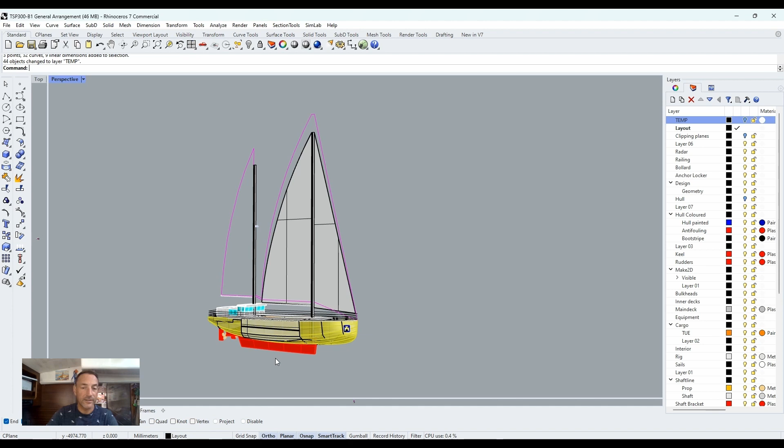So let's get started - we're going to have a look at what I've done up till now. I worked on the hull, the keel, the rig, and the sails, and I'll show you where I am. I'm currently working on a general arrangement, and I've started with it, so I'll quickly do an update of what I've done so far.

As you can see, the orange and purple lines are the new sails - this is an increase of almost 50 square meters. I've raised the masts and also the boom line a little bit to give more clearance for cargo handling.

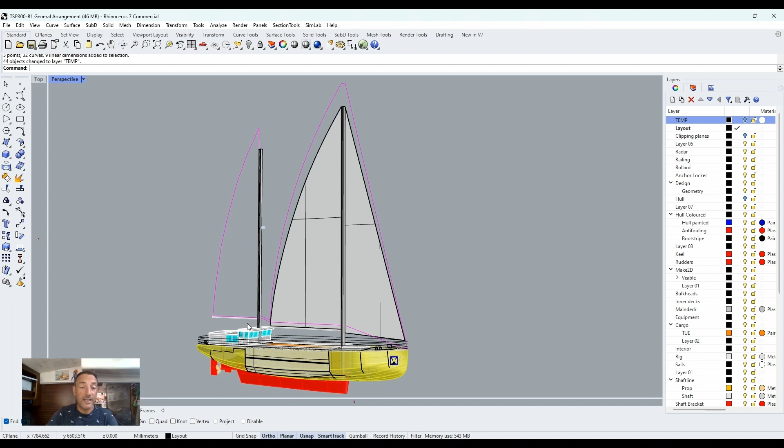And I've also raised the aft boom to give more height for the new deck house and seating area. Today I'm also going to try to put the accommodation down into the hull and raise the aft deck, aft of the bridge. Yeah, so this is the new hull.

I've been very busy fairing it. I've improved the bow shape, and the surfaces are all developable now, so you can actually make them all out of flat plate.

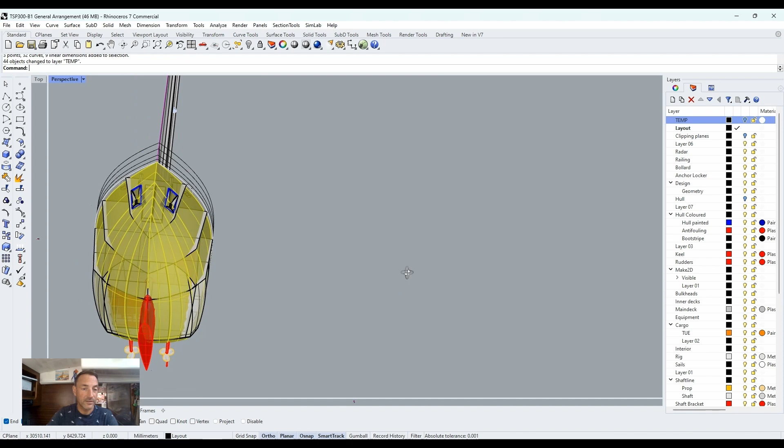As you can see, the hull has gotten a little bit wider. I went to 7 meters instead of 6.9 as discussed. The volume was getting too small, and I would have had to increase the block coefficient too much, so I opted for this option.

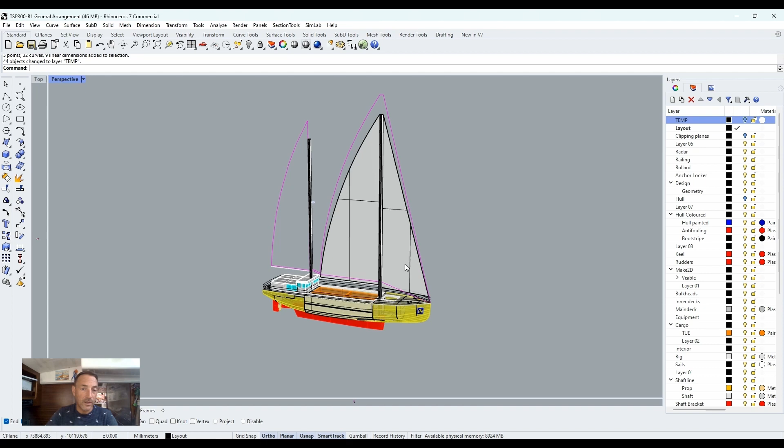And today I will be working on this - I'll make the masts longer, detail the rigging as well, make the sails bigger, and play with the accommodation.

So at the moment I'm having a puzzle with the interior layout - I'm trying to get as much cabin space underneath to be able to bring as many passengers as possible.

Yes, so this is what it looks like at the moment - big mess. But I've got the captain's cabin here, and here are the guest cabins and crew cabins.

My puzzle at the moment is whether I'm going to have the beds long ways or transverse. I had a look online on forums, etc. Normally on our boat we sleep long ways, but I also know there are people who enjoy sleeping transverse.

So for now it looks like transverse is a better option because I can get better natural light coming from the sides of the boat into the cabins. Might be nice as well, especially for ventilation.

Yeah, that's the puzzle. So we're going to have the bridge still up high - I've raised it a bit. We're going to have the galley and the settee behind it, and behind that will be a large open deck space for outside seating. And below, I'm still having a puzzle.

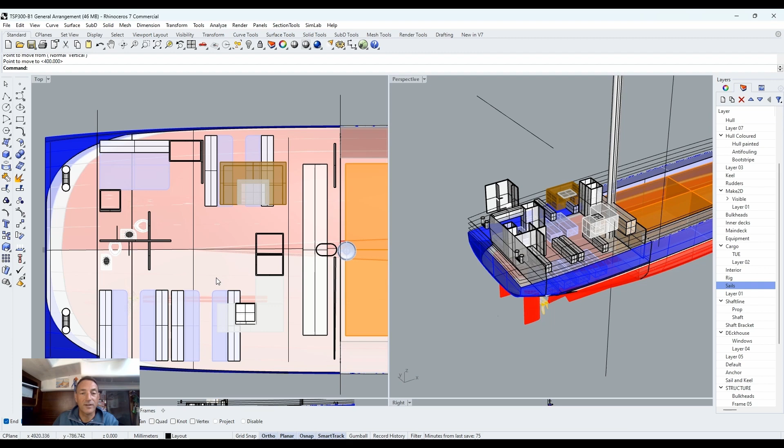So just wanted to show you roughly how I'm puzzling it at the moment. I'll also show you the raised aft deck as I've got it now - not finished yet, still have to do the bridge and make it all look a bit prettier and sexier. But yeah, it's the puzzle, so I'll keep puzzling on.

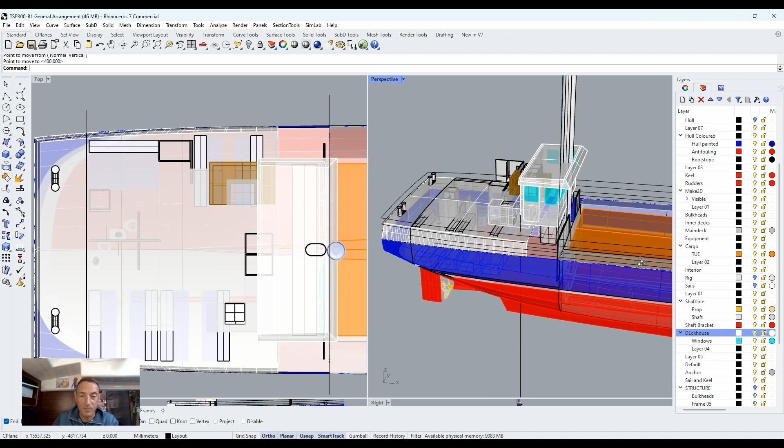So let's have a look at the final model I've created. Let's first go and have a look at the general arrangement. I'll do this all in Rhino, so it won't look as slick as the printed PDF, but come along.

So this is the new GA. I've plotted the deck views, the top views over the sail. As you can see, I've put the rigging in as well, so we don't just have a mast, but also some spreaders now and some standing rigging.

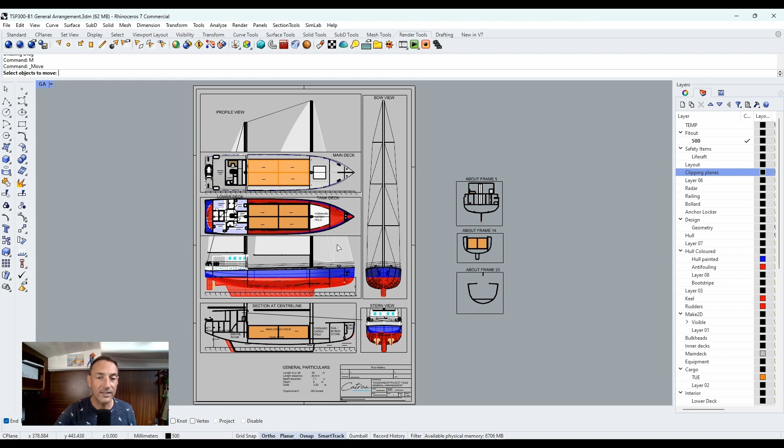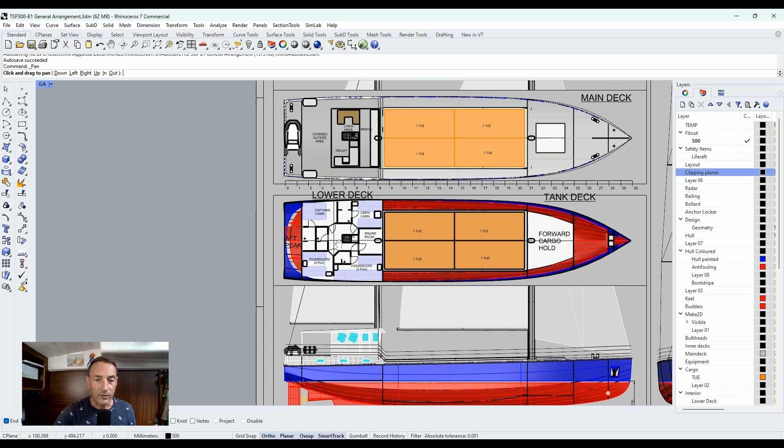My biggest effort was in the GA - I call it the interior. I'll zoom into that, so let's see what we've got upstairs.

We only have the bridge still, the wheelhouse where you steer the boat from. From here you can go into the crew mess, so there's a table and chairs - this isn't enough for all the people now, but enough for the crew.

And you go down - there's a galley, and here are the stairs just to go down to the lower deck area.

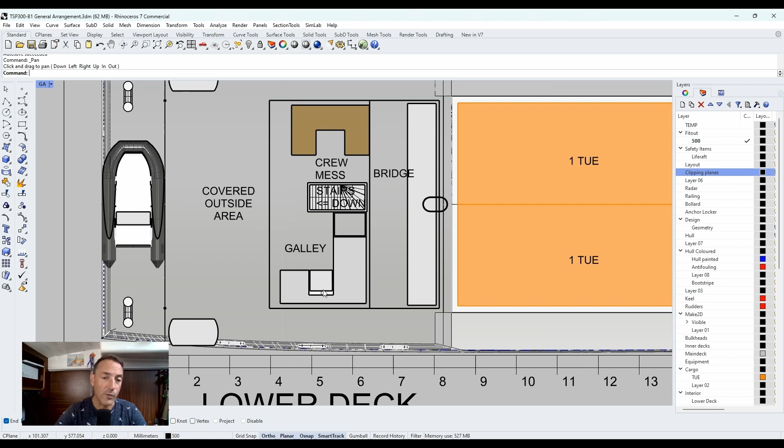Behind the bridge, we've got a covered outside area where you can put some picnic benches to sit outside but under cover.

We've got 2 life rafts, Mark, and a rescue boat, which is a requirement, which can be launched using the mizzen boom. As you can see, we've got the cover extended, the life rafts, and that's the dinghy - again, from here you attach the boom and swing out the dinghy.

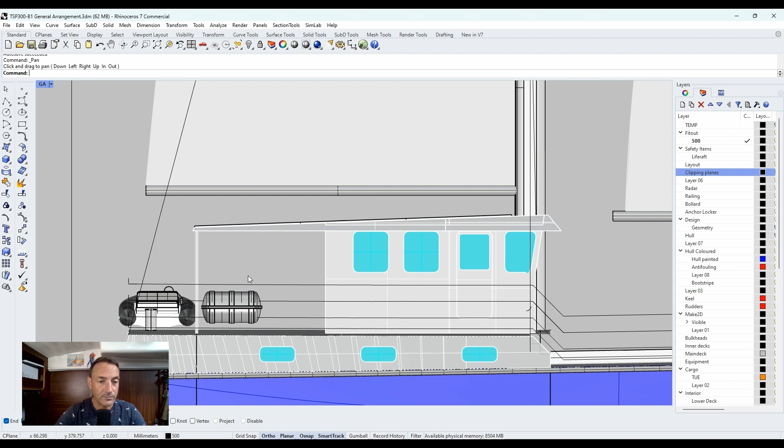Let's go to the lower deck. So the lower deck, we've got down the stairs, and basically a hallway. From here we can go to the captain's cabin and the crew cabin.

This is for 3 crew. So we've got a double bed on this side and a single on this side, and some cupboard spaces. They've got their own toilet, and the captain has got his own toilet.

And then I've added 10 passengers. It's actually possible to fit that many passengers in. It's pretty cramped, but it is possible. They're all on bunks, so we've got a bunk for 6 people, and here, 4 people on a bunk. They share 2 toilets.

So that's one toilet for 6 passengers. There's a toilet here, and for the 4 passengers there's a toilet here, which also doubles as the day toilet. So if you need to go to the toilet, you just go down the stairs and into the day toilet, so you don't have to go through your room.

That's the interior as it is at the moment. Let me know what you think of that.

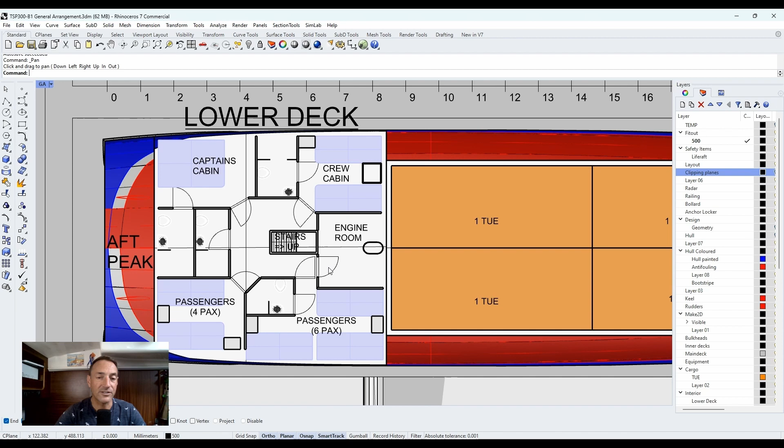Oh yeah, sorry, and we've got the engine room access here. So here's a space which will be full of probably electrical boxes, and from here you can take a ladder down to the engine room. Something I haven't detailed yet, that will come in a later stage, but at least the space is reserved for that.

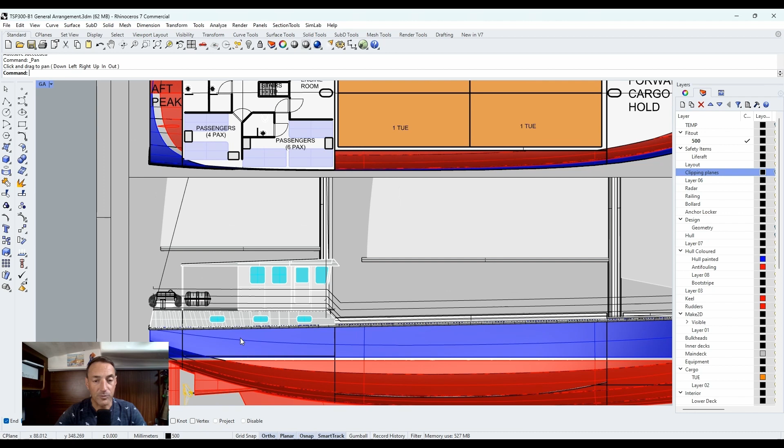So to have a look - I've raised the wheelhouse a bit and extended it. And here I raised the aft deck, as said, which created a space on the deck to have more space, using the full width basically for accommodation. So I put some portholes in, and they all line up with the rooms.

So this is what the boat looks like now. I've also added a bow thruster, Pete. So this should be roughly the right size for this boat. The further detailing will come later in the project.

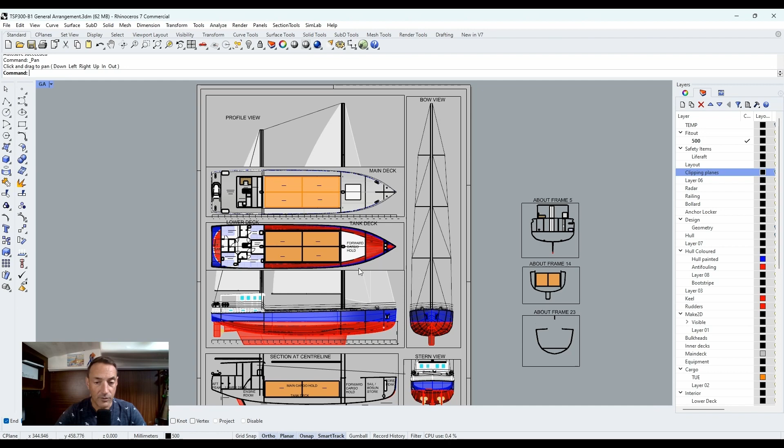More we got - so this is the through section. As you can see, here's the upper deck, stairs downstairs, and here's the lower deck. We've got the aft peak.

Oh yeah, another thing I did is move the rudder and the props further aft, which gave a bit more height for the electrical motors at the back, and also put the steering machine in the aft peak.

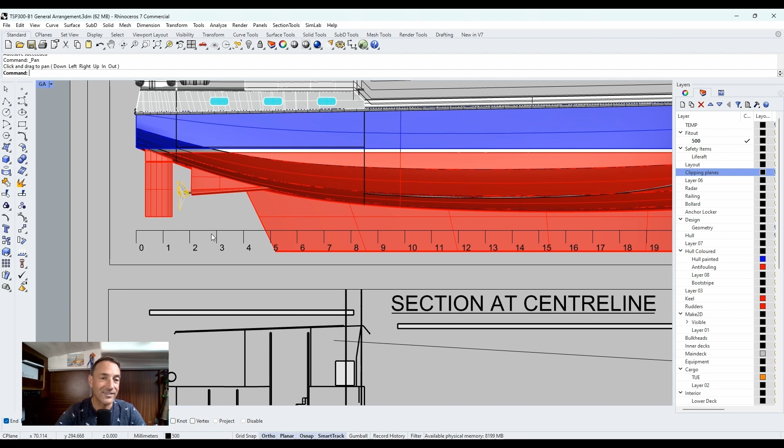So at first I had this funny step in the bulkhead, and now we just got one single straight bulkhead. Jeroen told me to keep things simple, so I've made that simpler.

So you can actually get into the aft peak from the aft deck, and there you can get to the steering machines.

So that's all for the GA, and the 3D model looks now like this. I'll just put it in rendered mode.

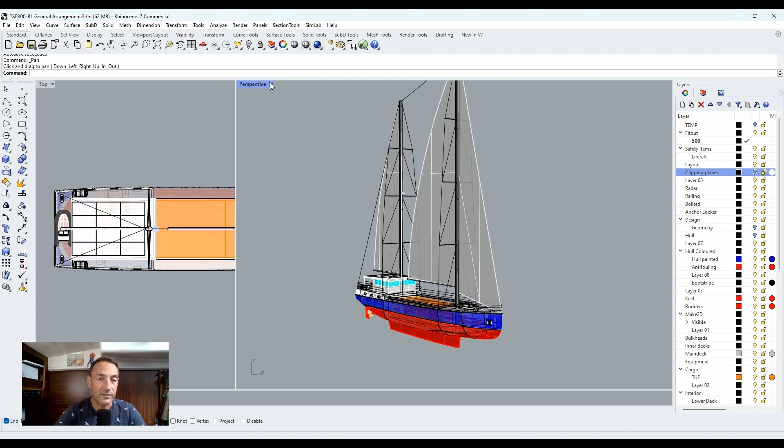Oh, this is what the boat looks like. I'm pretty happy with it.

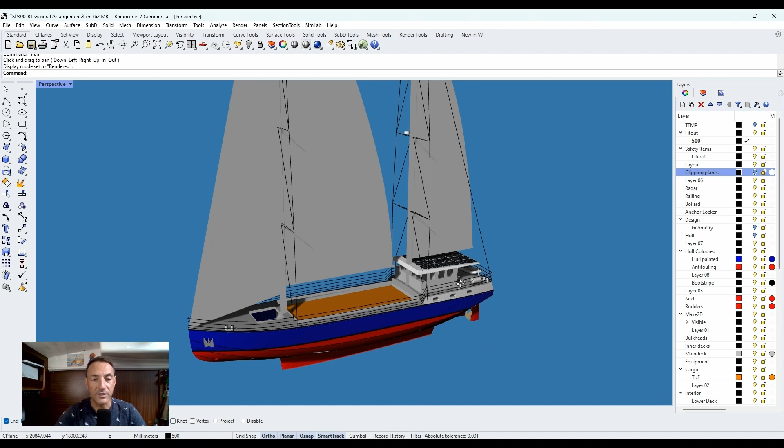The solar panels, yes, forgot about that. I've been able to fit 12 500 watt solar panels, so we've got 6 kilowatts worth of solar on the cabin top. Of course, it will be shaded by the sail, so I expect it to be half efficient, so about 3 kilowatts of power generated. But at least it's a fair decent amount, and not a heavily used area.

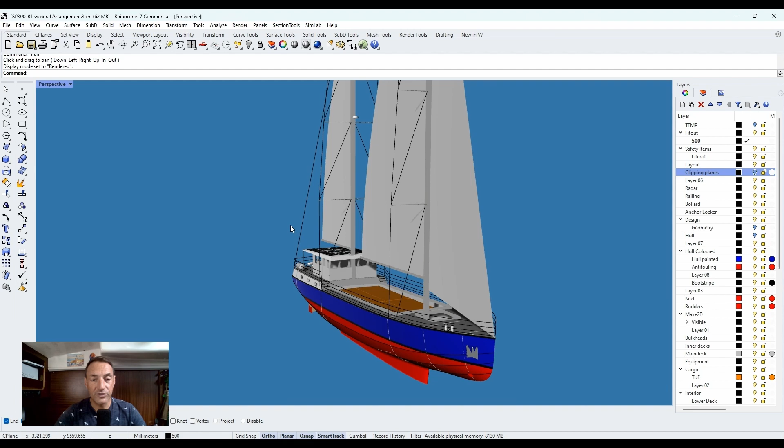So yeah, let me know what you think, and I'm pretty happy with this result. So we got 10 passengers, 4 crew, 150 tons of cargo, and a 30-meter length.